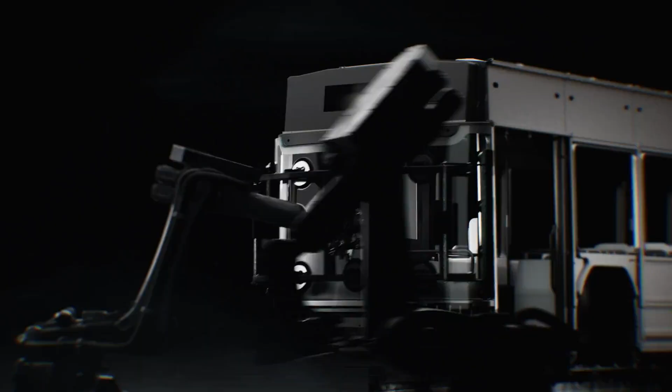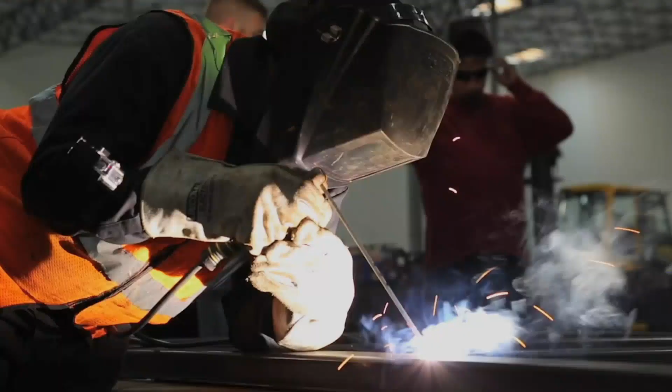A global technological revolution is underway. We think in the next 10 years, you'll see more innovation than we've seen in the past 50. Driven by passionate, dedicated individuals intent on shaping a new world. I want to create something new. I want to create something that gives me the sense of creating new life. This is why I'm here.

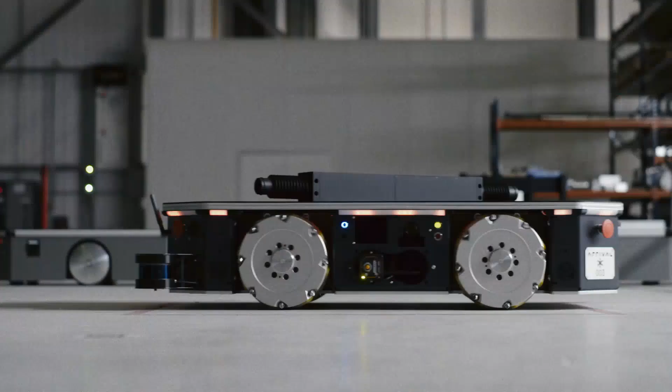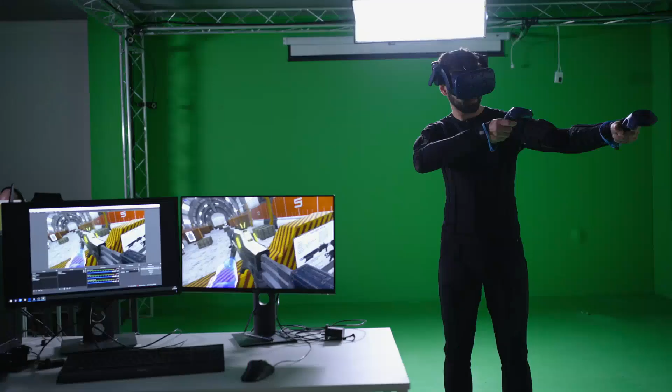A greener world. This is the last call to action, that we have to develop the solutions that are protecting our planet. A better world. I have a family, and when I think about the life I want them to have and their children to have, I want them to experience the world where they can travel and live without worry, and that gets me up and going every day.

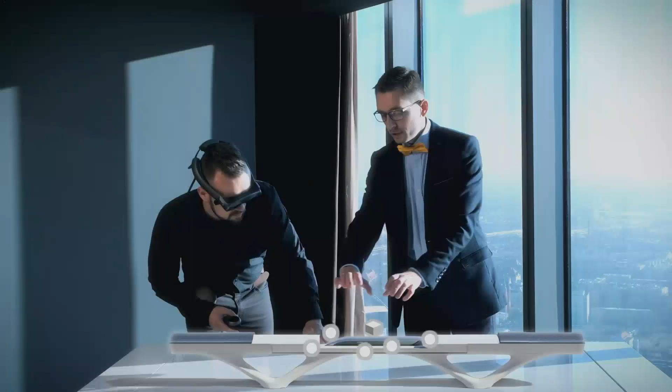Together, they are pushing engineering to its limits. Human creativity is the most tremendous power, and if you set a target, things that you never thought possible become possible. Creating extraordinary machines that can help the planet and humankind in the future.

If we are to stand a chance in our struggle to limit global warming, a change in the way we travel will be essential. Transportation accounts for 24% of global CO2 emissions. And in the US, that figure is 29%. The vast majority of it comes from what we drive on the road.

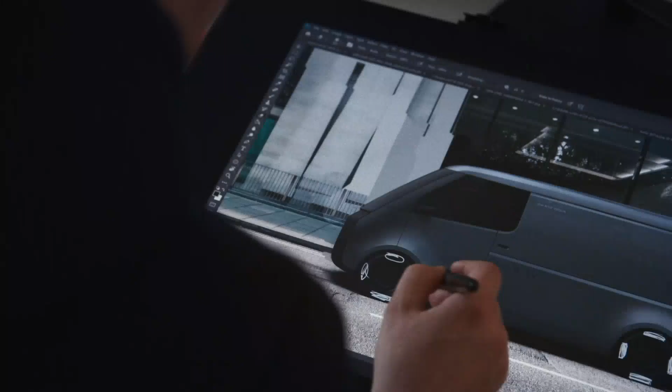Our relationship with the automobile has been a defining feature of modern life. But as we make the transition to electric power, many experts believe that the nature of this relationship is about to undergo a revolution. Without doubt, this presents a challenge, but it also presents the opportunity to redefine the way we travel.

No stranger to thinking differently about how we use vehicles is Robin Chase, co-founder of Zipcar, one of the world's leading car share companies, and Veniam, a data network company that is helping to support what's known as the Internet of Moving Things. She's worked with institutions and authorities around the world, developing innovative transport strategies.

I think of transportation as our gateway to opportunity. Whether you want to be educated, see friends, have a job, be healthy, go shopping, everything resides upon, can you get there? How much time, how much effort, how much money? It is the glue that makes our entire lives possible. So the idea that there's one type of vehicle or one type of mobility solution that will service all of our needs is craziness. And that was what happened in the last century.

When people buy a car, what happens is they think about their largest use case. They think, oh, I need to have it so in August I can take my family on some big trip with everything in back. But in reality, 70% of our trips are us alone in the car. And 50% of our trips are less than 3 miles or 5 kilometers. So the reality is, it's us moving alone by ourselves for the vast majority of our trips. And cars, whether they're electric or not, are vastly oversized for what we're actually doing.

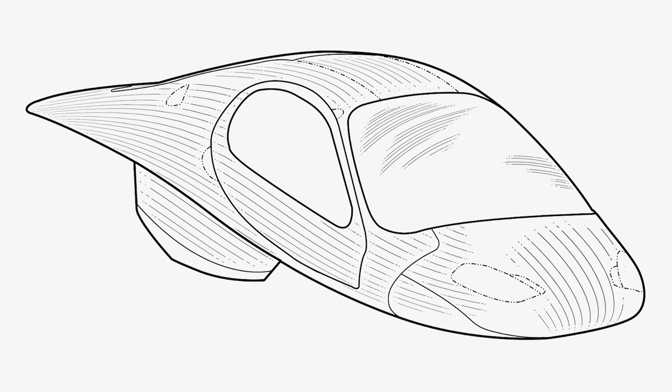That's a problem. And he said, I think that we can build a vehicle that takes that aerodynamic drag almost down to zero. Perfect, sign me up. Let's build that vehicle. And we didn't start with a marketing study or a focus group. We started with the engineering problem of how do you make transportation more efficient? And then we just ticked through the boxes on what would make the most efficient vehicle platform. And what you end up with is something that looks like what I have behind me.

When I first started looking at low drag shapes, I thought, well, let's look at the Streamliner hot rods from the 1950s and 60s. You had a lot of veterans who returned after World War II and were taking aircraft parts and drop tanks and turning them into hot rods and then taking them to the salt flats and seeing how fast they could go. And for the amount of horsepower and the size that they were, my back of the napkin calculations said that they should have been able to achieve much higher top speeds because of the streamlined shape.

What I didn't realize, and I guess maybe what they didn't realize at the time, is that a perfectly symmetrical streamlined shape has very low drag in the free stream, up high in the air. But when you bring it close to the ground, it has a completely different effect. In ground effect, it becomes a much higher drag shape. And so to make a streamlined shape that's also low drag in ground effect, it looks different.

And as it turns out, lots of creatures, fish, catfish, sharks, etc., that swim in the free stream, when they get down near the surface, they will change their body shape to lower their drag. And the reason they lower their drag is because nature hates inefficiency. Nature doesn't do anything inefficient. It's all about saving energy. So sharks really taught us a lot about how things work in ground effect. So that's why the Aptera looks a lot like a fish or a shark swimming close to the seafloor with a hump in its back.

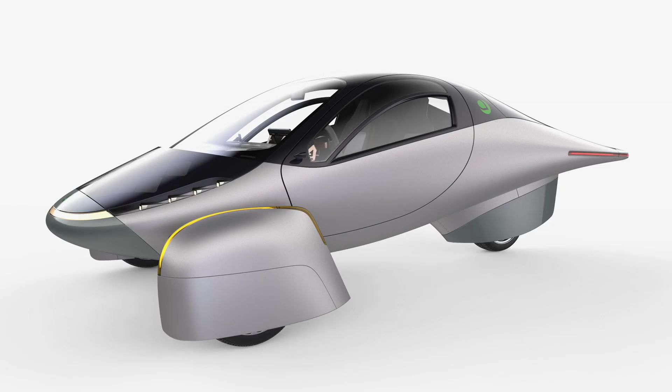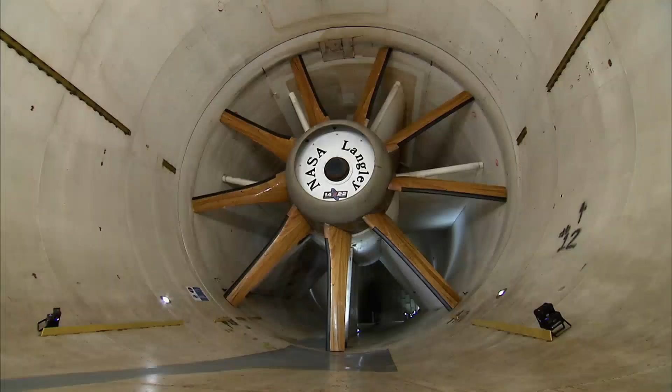Before we went out fundraising, we said we need to have some third-party seal of approval. Who could we get to also examine the shape, maybe put it in their wind tunnel, give us a thumbs up that it is low drag. And so we hired NASA Langley low-speed wind tunnel. And we had a conference call with them, and you could hear all the scientists on the conference call. They're like, this is the lowest drag road vehicle we've ever seen. Like, what are you guys doing? How does this work? And we said, what? We hired you to tell us how it works. You're NASA.

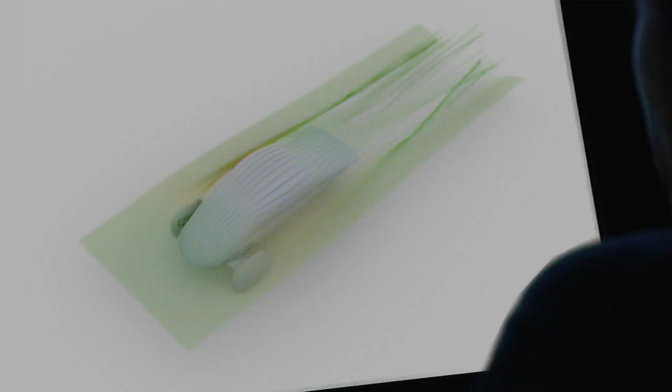What has enabled the team to fine-tune their design in a way that would have been impossible a decade ago are the advances in computational fluid dynamics. This is a computer tool that can accurately analyze complicated aerodynamics and airflows. We bought a lot of servers. This is after we got our funding, and we ran CFD 24 hours a day for virtually every shape that touches the wind in the vehicle. The processing power that you can put to these problems now is just immense. We can load a full vehicle model into our simulation deck and run it on a web server and have results in 4 hours now.

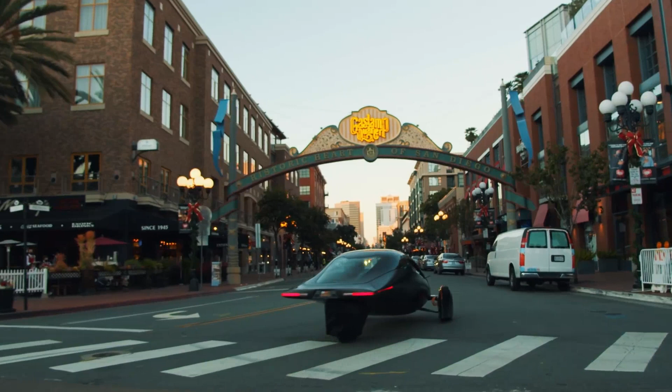Incredibly, the entire Aptera car has less aerodynamic drag than just one side view mirror that you'd find on an average American pickup truck. One aspect of the vehicle's design that often draws attention is the fact that it only has 3 wheels. We determined that if we got rid of a rear wheel, one, we don't really give up any performance characteristics, but we gain in aerodynamics, we lose some weight from having the structure to hold that extra wheel, and we have less rolling resistance. So you have a certain amount of weight that's deforming the tire constantly on every revolution that you ever drive. So if you can decrease the amount of contact patch on the road, you get better overall efficiency.

Our vehicle can go around the track as comfortably and as securely as any comparable 4-wheel vehicle. And one thing crucial to its stability is its center of gravity, which is greatly helped by the choice of powertrain.

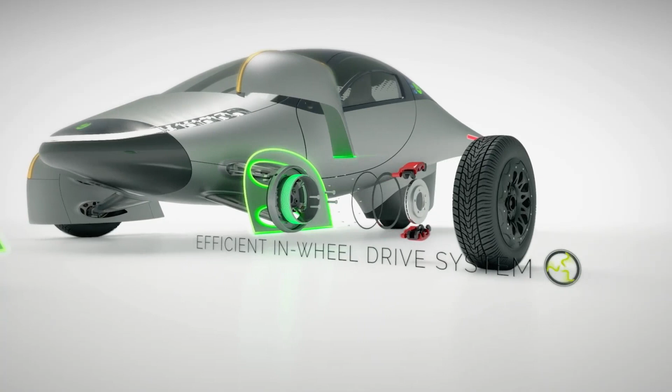How we power the vehicle is actually through the wheels. The motors are designed into the wheels. It takes the weight and puts it out at the corner of the vehicle, so you have a better center of gravity, which gives you more torque, so you get better 0 to 60 time acceleration, and it gives you more regen capabilities, so it saves your brakes and gives you better overall performance.

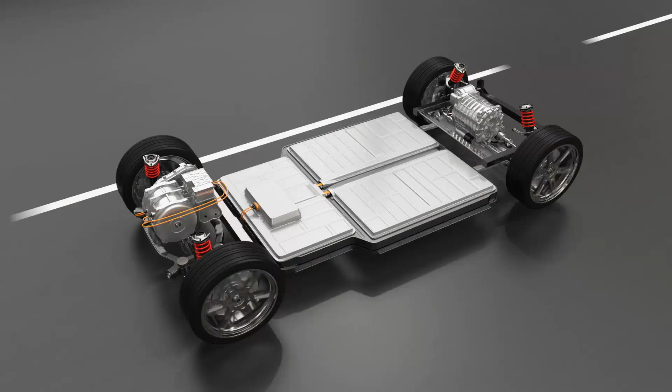Weight is crucially important to our efficiency, so the more we can reduce weight, the better. And one of the heaviest parts of an electric vehicle is the battery. Well, batteries are the most expensive part of the electric vehicle. And so if we can fundamentally reduce the number of batteries necessary to go from point A to point B compared to any other electric vehicle, then we're able to offer something that costs less to make and costs less to sell.

The combination of less weight, reduced rolling resistance, and world-leading aerodynamics means you need less energy to power it. With 100 watt-hours per mile energy usage, you can do things like charge with a regular extension cord from your garage. The same cable that you charge your cell phone with is a cable that you can charge the Aptera with up to 200 miles overnight. Also, if you're on a trip and you go to one of the roadside chargers, you're charging 4 or 5 times faster than any EV around you.

But the Aptera has one more energy-saving trick up its sleeve: its solar-powered charging capability. All the more pertinent given the US Department of Energy's predictions that electricity consumption is set to increase by as much as 38% by 2050, in large part because of electric vehicles.

We have a 700-watt solar panel on our roof, and that can produce over 4 kilowatt hours of power per day in sunnier places. That's 40 miles of free driving per day just because you parked it out in the sun. But for most Americans that drive less than 40 miles a day, 60 kilometers or so, you wouldn't have to plug it in. And the reason why it's even feasible is because the vehicle is so efficient.

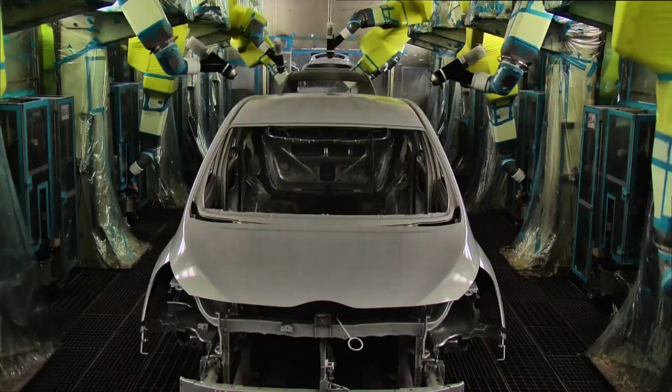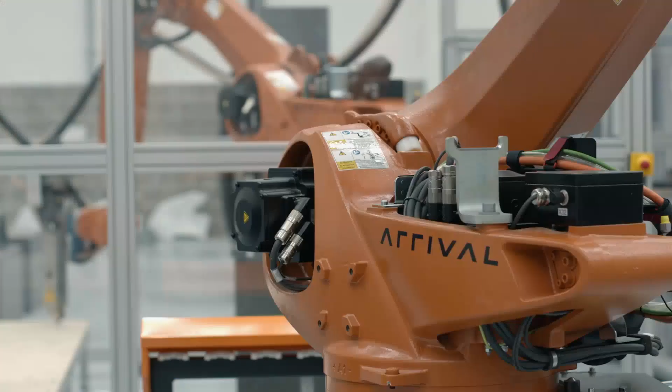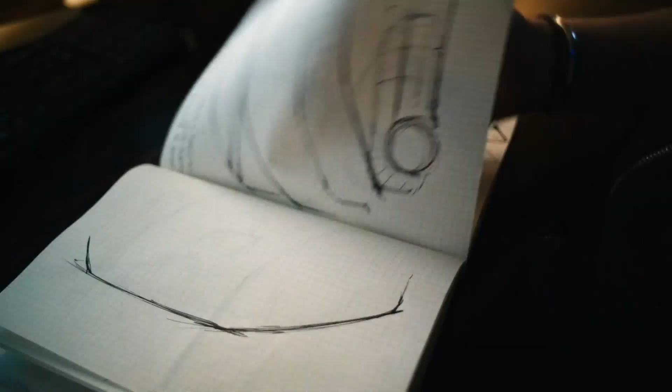When Denis Sverdlov decided to found Arrival, it was because he felt it was not just the type of vehicles that needed changing, but the entire auto manufacturing model. That is not enough, because we still get vehicles which are expensive and that's not sustainable. You don't need to have a compromise between being green or being efficient. And that's why we started Arrival in January 2015 with the idea to reinvent the way vehicles are made. But where to start? Well, for Denis and his team, one particular sector above all stood out: commercial vehicles.

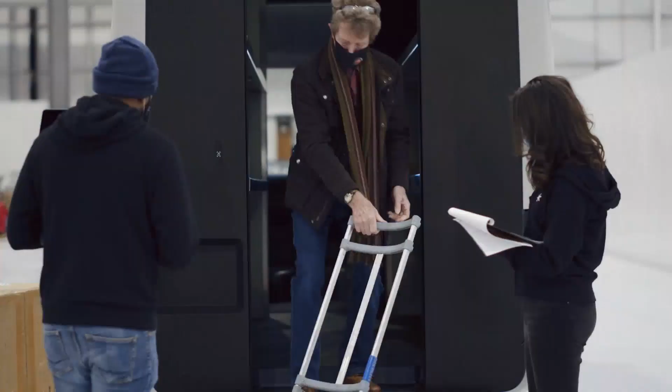These are the vehicles that are being driven 8-10 hours, day after day after day. If there are any vehicles in a city that you'd want to replace with zero-emission vehicles, it would be these commercial vehicles. One of the aims of Arrival is to be able to work with companies and create a bespoke vehicle specifically targeted to their needs, which is exactly what they've been doing with UPS, with whom they have jointly been developing a new delivery van.

But how will this new startup company compete on price with established automotive giants who spent over a century mastering the production line and economies of scale? I think the real opportunity with a startup, with a new company, is you don't have any of those existing assets. You can set off in a completely new direction.

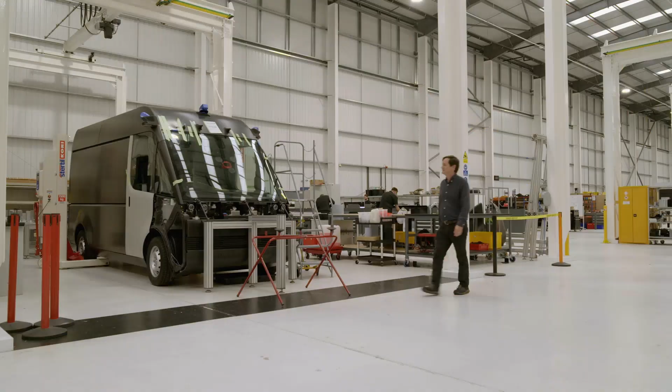The approach that Arrival has taken can in many ways be encapsulated by the words of the influential 20th century economist Ernst Friedrich Schumacher. He wrote something along the lines of, any intelligent fool can make things bigger and more complicated, but it takes a lot of courage to move in the opposite direction. I love this quote. It really captures our DNA, what we do here, how we develop things.

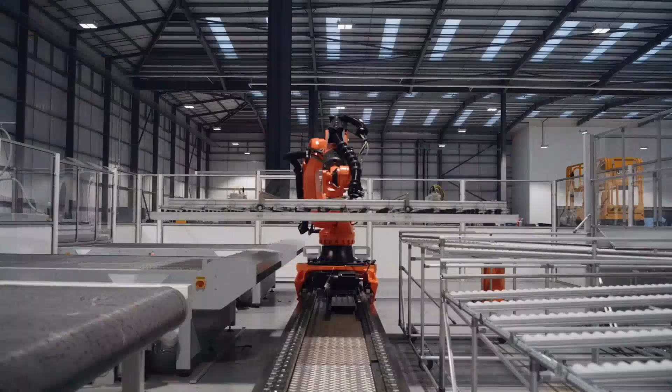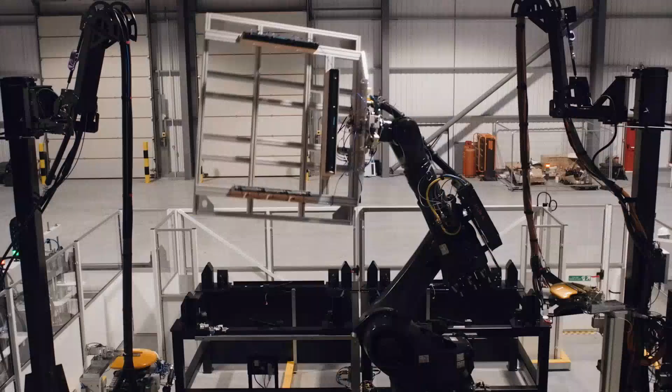Large automobile factories can take years to build and have a price tag of over $1 billion. Arrival believe that for just $50 million, they can take over an existing warehouse and within 6 months be able to produce 10,000 vehicles a year. Able to be built all over the world in locations where the vehicles are needed, they will employ local people, pay local taxes, require less infrastructure, and be able to provide specific models suitable to that location.

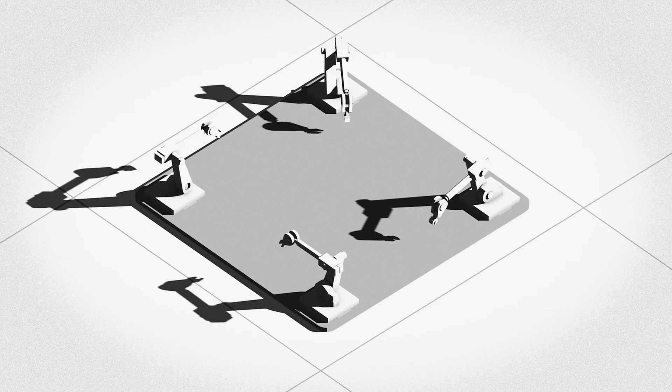They call it a microfactory, which instead of housing a conventional production line, uses a collection of robotic cells. And we have a whole array of these cells that do different operations. But the key to it is how we link them together. We link them together through mobile robotics. So literally a little wheeled robot that carries parts and vehicles from cell to cell.

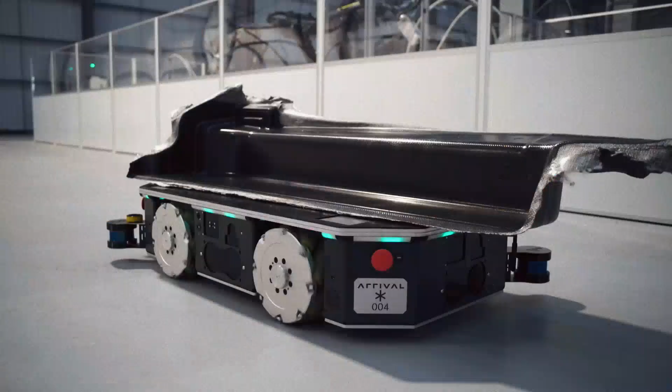I've been building robots since I was a kid, right? From toys. I was fascinated with robots. I was fascinated with the spacecraft. So all my studies over the years were focused on this: space exploration, robotics, and AI. I met Denis after having worked on a space mission for the European Space Agency. We discussed how to use technology to have a positive impact on people. And we liked each other, and I jumped on board. I left the space program and I joined Arrival.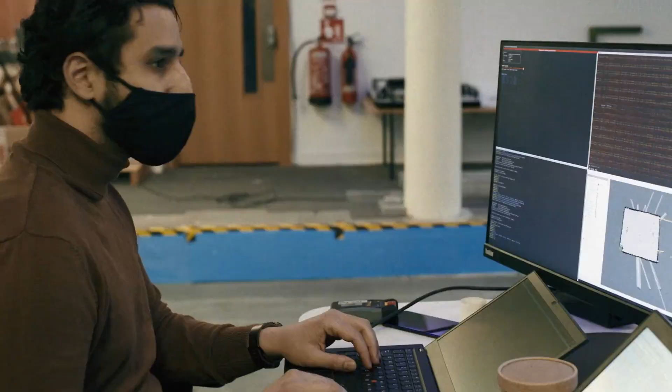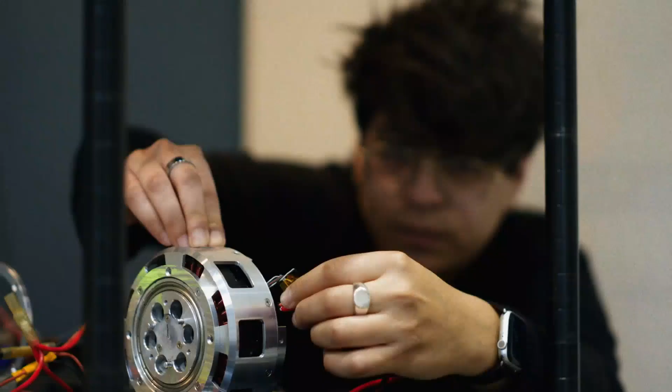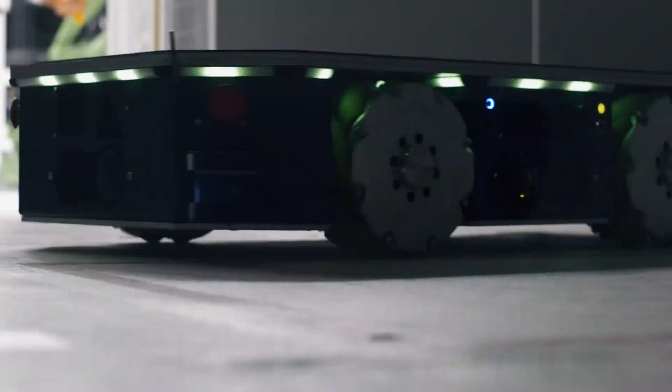Where once in the traditional automotive industry, it was tool makers who were crucial for the implementation of mass production, today a different type of engineer is at the heart of this new way of building vehicles. More than half of our people are software engineers. We are strongly software people. What this means is that we spread intelligence in every robotic asset that we have on the shop floor. These robots sense and perceive the environment. They gather the data, they process it in real time, and they use this data to execute operations in real time. If something changes in the environment, they react.

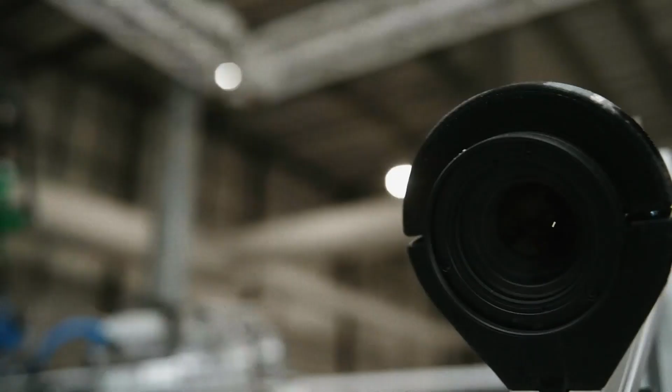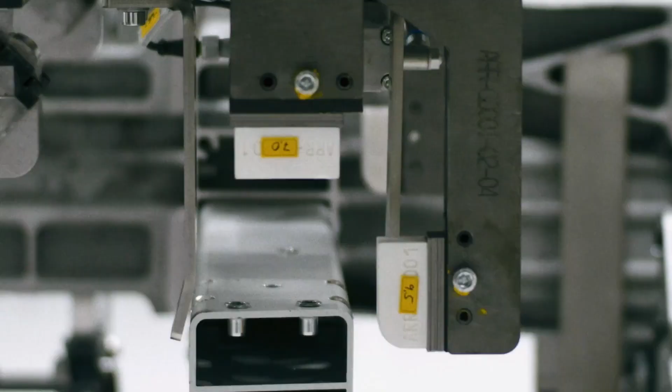And then we have an operation control system. You may think about it as the overlord of the factory, right? The AI that runs it. And this system continuously gathers information from all the children, from all the robotic assets on the shop floor. We have done a lot of work on computer vision, and we've developed something quite unique. Our systems are capable of understanding the position of an object, classifying that object, understanding the position in 6 degrees of freedom, so in space, in any location, with sub-millimeter accuracy.

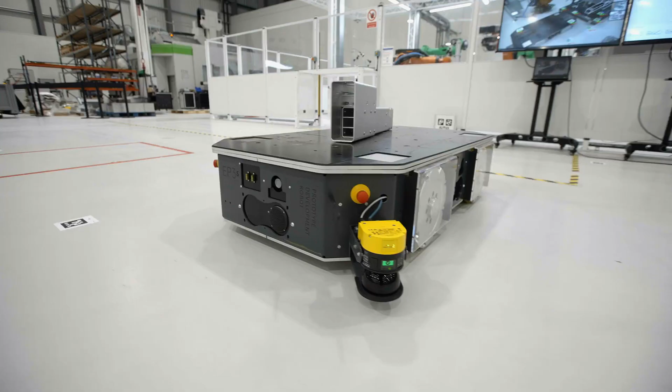These are robots that can navigate autonomously in the environment, can avoid obstacles, can detect any anomalies in the environment, and can react dynamically. And also work together. These robots can connect to each other to create a larger platform that can transfer bigger and larger payloads. But as clever and sophisticated as the system is, if the microfactory concept is going to work, it'll need the right materials to work with. I'm going to be a bit biased here, in that I think materials are foundational to a lot of this.

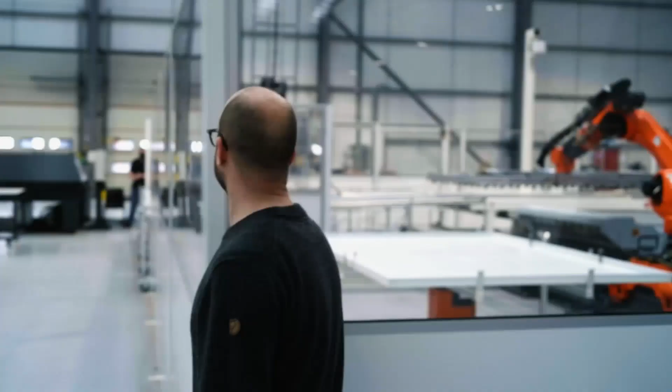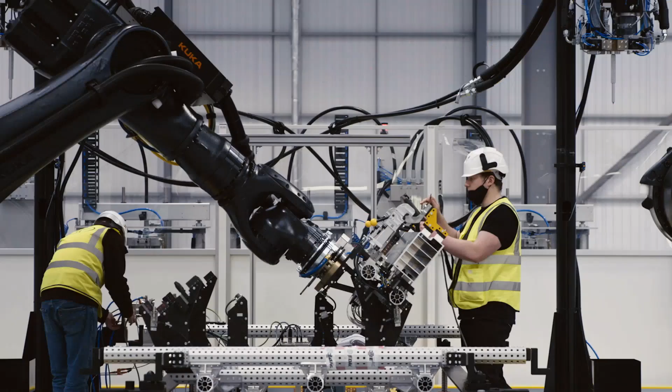If you're going to manufacture something anywhere in the world, then you can go one of two routes. You can either source in one place and transport it, or you source close to where you're making. And our strategy is very much to try and source as close as we can to the factories to support local communities, local economies, and to build relationships in those areas. So if we want to be able to build a microfactory anywhere, on a high street, in a warehouse, you have to start asking questions about the kind of materials that are going to go into the factories. They also have to be recyclable, because you need to be able to reprocess them wherever you are.

You know, if a van's built in one part of the world, it should be recycled wherever it ends up. So that drives a certain type of materials logic. In order to meet all these criteria, it was decided to use an aluminium chassis onto which would be put a body made from thermoplastic composites.

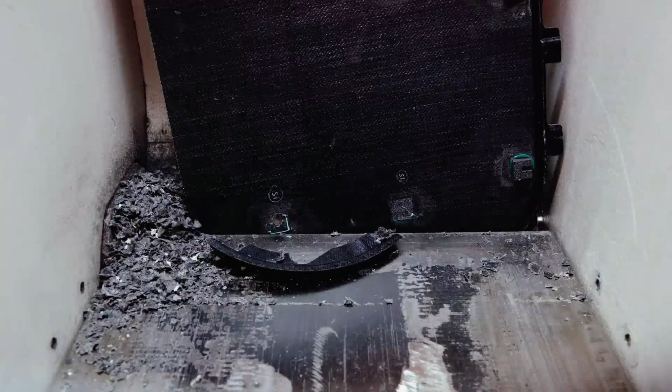Able to be molded into shapes when heated, thermoplastic composites differ to many other forms of composites because it's a process that can be reversed and repeated many times, making it perfect for recycling and giving the product an almost indefinite shelf life.

It's where there is a huge amount of innovation in the industry. We can process that by 3D printing, so we can make prototypes. We can turn it into injection molded components. We can process it into compression molded or extruded, or you can make garments from thermoplastic materials. The amount of opportunity of thermoplastics is just immense.

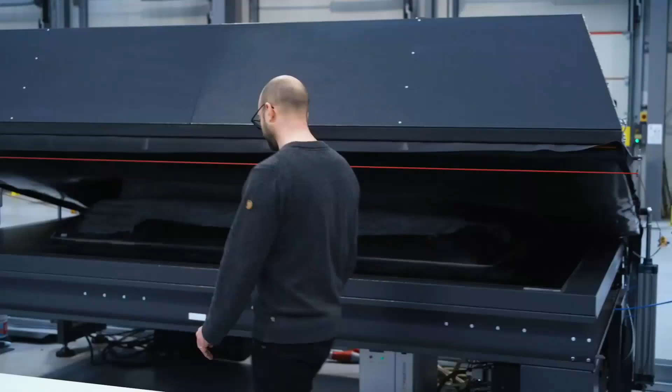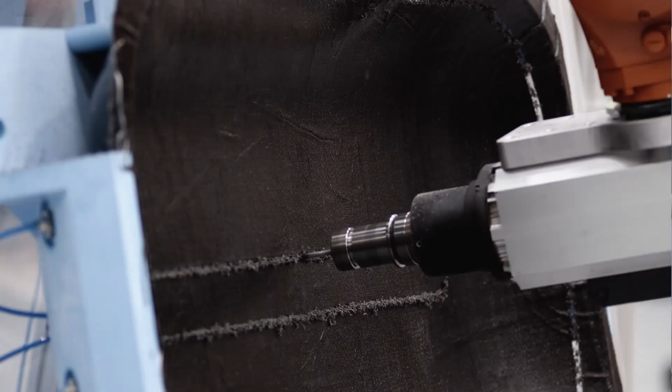The company have developed their own composites, tailor-made for their requirements. Those destined for body panels arrive at the factory in the form of rolls of fabric. These are cut to size, layered, and molded into a variety of different shapes, and all done autonomously, using far less machinery and energy than a conventional automotive plant. And what's more, waste is eliminated because the properties of the material allow any offcuts to be recycled and made into other components.

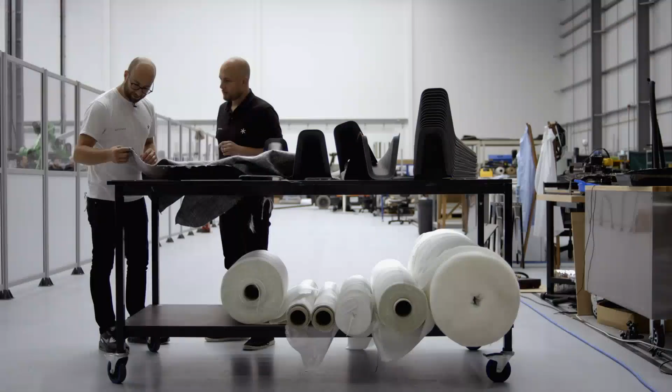That's so fundamentally different from the conventional way of working. When people join the company, it's quite mind-blowing. We are weaving fabrics and knitting, and there is no paint. The color is throughout the panel, and you can recycle the whole panel at the end of its life. Panels are also able to withstand impacts in a way that no steel equivalent ever could.

All of which is of considerable appeal to commercial fleet operators. Their vehicles are their brand that's rolling around in those communities day after day, so they always want their vehicles to look their best. They spend an enormous amount of money every year per vehicle to keep their vehicles looking so good.

This combination of versatile materials and a highly agile production process is also changing the way the company approaches its research and development. So in regular R&D, I'm used to working on projects that are 2 to 4 years long. And here we're expected to turn around proof of concepts in a matter of weeks. If it takes longer than a month, then it gives us pause for thought. The point is to prove your idea as quickly as you can, and then that means that you can cycle through ideas much quicker.

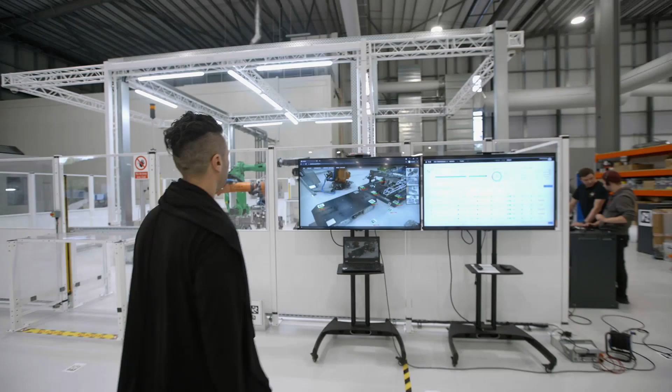So the other core concept for us is that failure is not a bad thing. I encourage my team to fail as often as they can, because it's only when you fail that you either discard an idea and move on, or you keep learning. This ability to utilize the AI software to transpose concepts into production has enabled the team not only to develop commercial vans, but also buses and rideshare vehicles.

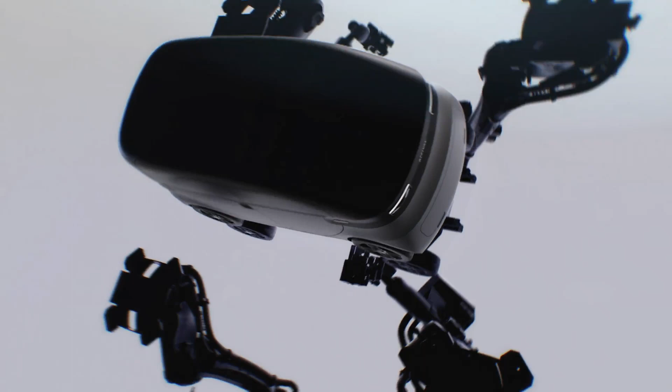With a growing list of customers, Arrival has already set up 1 microfactory in the UK and 2 others in the US, with more planned for other countries in the pipeline. In hindsight, some of the most revolutionary ideas seem obvious, and I wonder if people will talk about microfactories that way in a few years. I can't explain exactly why nobody's thought of it before, but it is clear that bringing together the right group of people on the right mission with the right set of objectives was an important part of developing this very different approach.

There are still many challenges that need to be overcome to successfully make the transition to full use of electric vehicles. Today, over half the world's population live in urban areas. In Europe, it's almost 3/4, and in North America, it's higher still at 82%. And these figures are only set to increase.

Many towns and cities have road layouts that are hundreds of years old, meaning space for charging is at a premium. It's sobering to consider that 40% of Americans do not live in a home where they can use a personal charger. So while some have been tackling the issue of electric vehicles themselves, others have been wrestling with the problem of how to charge them.

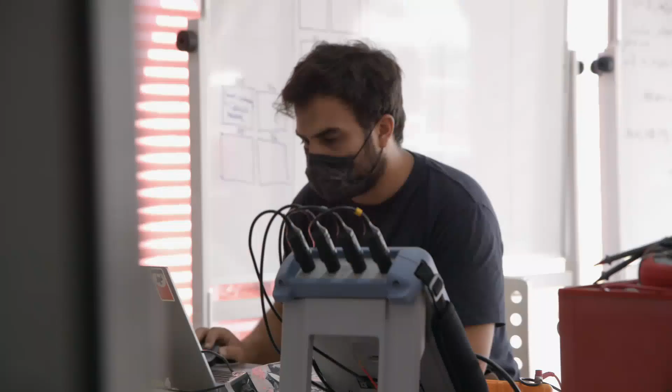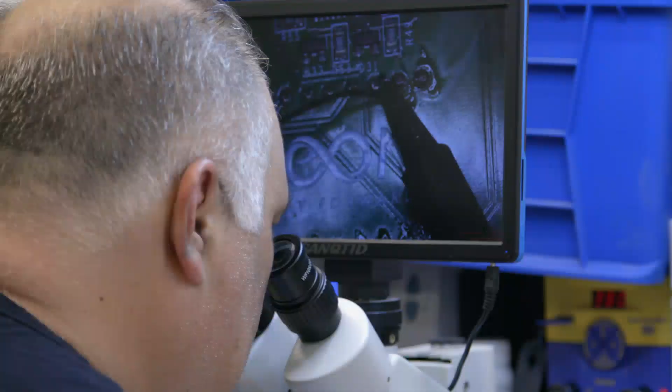It was a brilliant concept, but sadly, at the time, there were no commercial applications. It would take another century for the principle to be adopted by charging devices in our homes. But for the system to be viable for large-scale vehicle use, it would need to be made much more efficient. When they started, it was estimated that almost half the electricity would be lost during the wireless transfer. But the team were confident that by fine-tuning all the various components, as well as the power levels and oscillation frequency, this could be dramatically improved.

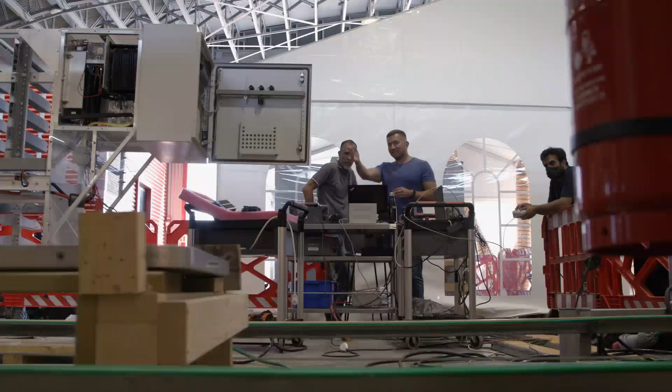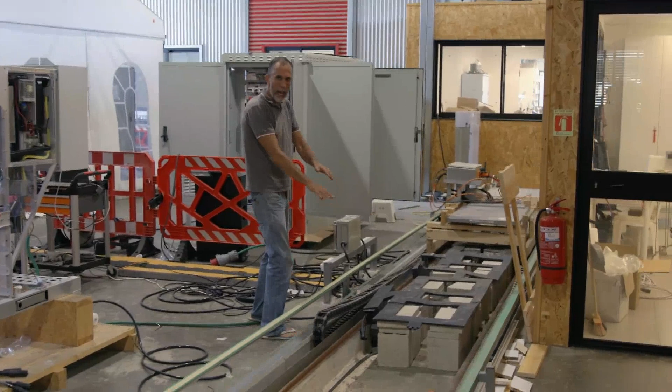So first, when we established the company, we focused on dynamic wireless charging or electric road systems. It means that we electrify the road and we charge the vehicle while the vehicle is in motion. So this device is part of the R&D work. You can see here that this simulates an actual vehicle driving on the road and being charged while driving. So those are the coils that are under the asphalt, and this is the receiver that is under the vehicle. Those coils are deployed under the asphalt about 8 to 10 centimeters.

The coils emit energy to those receivers only when there's an authorized receiver that communicates with the coil, and then the energy is delivered. Otherwise, those coils are totally passive. So as a general rule, our wireless charging technology charges at approximately the same speed as any standard conductive charging solution that you can buy and use at home. Having developed the theory, they built a 300-meter test track where they spent 3 years testing a variety of vehicles and perfecting the system to a point where it achieves an energy transfer efficiency of up to 91% in test conditions.

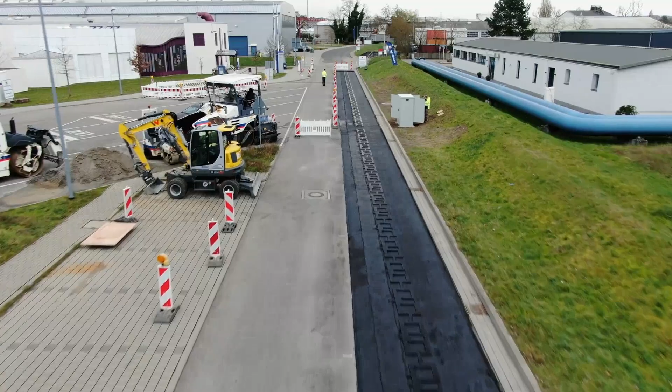They also perfected the system to charge static and parked vehicles. It can be installed in locations where conductive or plug-in charging cannot be. So locations like bus stations and garages, inside city centers, underneath taxi queues or stands, directly under the loading docks at commercial facilities, and of course roads and street parking, for example, because there's no interference with the pavement or with the road. Everything can be underground. With the ability to charge both moving and stationary vehicles, the next step was to put it into practice in the real world.

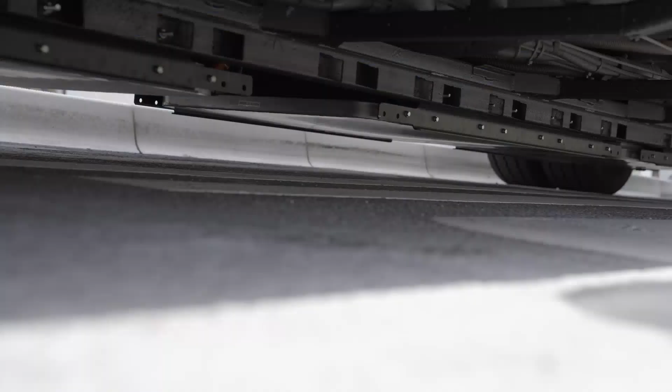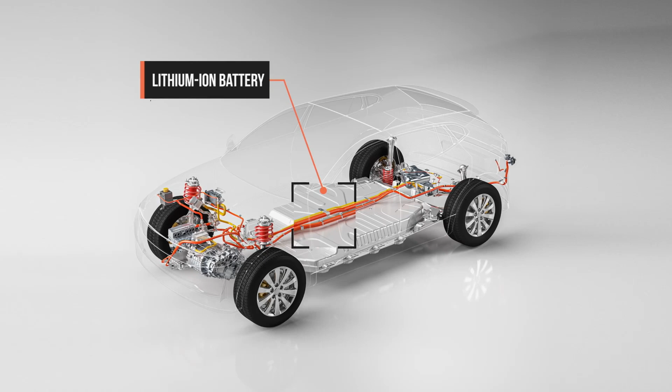In Tel Aviv and in Karlsruhe in Germany, we have a public pilot on the roads there with the public bus operator in the city. And in both instances, we're demonstrating that a combination of stationary charging at the terminal or at the bus station for a few minutes while the vehicle is parked, plus some small stretch of dynamic wireless charging along the route of the bus, is enough to power the vehicles so that they can run 24/7, and we can simultaneously reduce the size or the capacity of the batteries. And it's this ability to reduce battery size that could be hugely significant as the number of electric vehicles on our roads increases.

There are about 1.4 billion vehicles on our roads today globally. We just haven't found all of the resources that we require in order to shift to electric mobility on a global scale. There are issues around destroying habitats, for example, from mining for cobalt or for lithium. And so anything that we could do to minimize the impacts and to minimize the size of the batteries is probably going to be a good thing. In theory, we can reduce battery capacity by up to 90% as long as we have wireless charging in convenient and accessible locations.

In Gotland, Sweden, they are already successfully operating the world's longest continuous electric road system, stretching over 1.6 kilometers. It charges not only a public bus at the moment, but also a 40-ton truck. What's so significant about this trial is that it demonstrates the ability to simultaneously charge different-sized vehicles with different energy requirements. The system is totally automatic, so the driver doesn't need to do anything, he just needs to drive.

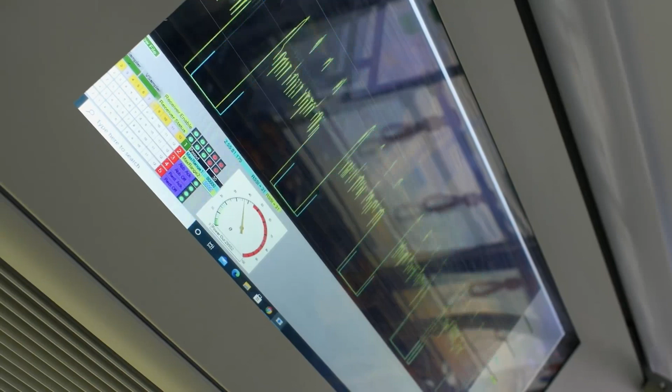We have a metering device inside the vehicles, so this is how we know exactly how much energy every vehicle consumes. Each 100-meter section contains 60 charging units, each able to charge an individual vehicle, meaning that volume of traffic will not be an issue. It is hoped that in Europe alone, there could be at least 14,000 kilometers of such roads by 2030.

But what sort of disruption would installing such a network cause? Of course, we're not suggesting that we would come into any city and tear up all the roads in the city. We're looking at finding strategic locations where it makes sense to deploy because you have enough heavy traffic. So if you looked at a city grid, for example, you'd be looking at deploying somewhere between 15 to 30% of the main roads. If deployed at scale, the team estimate the costs to be around $650,000 per kilometer.

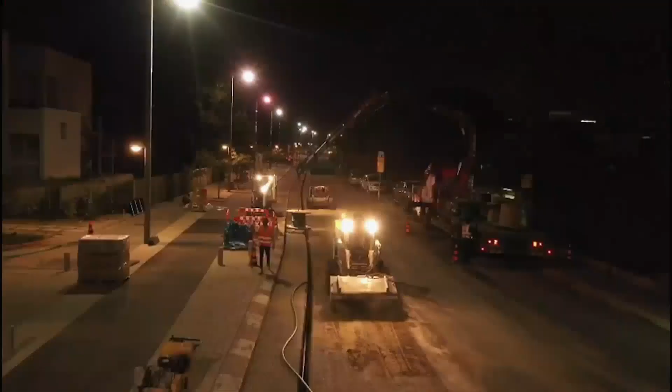When we established the company, we had a mission to deploy 1 kilometer within 1 day. And actually, it was a joke 9 years ago. But today, we can show that we did it twice, in Tel Aviv and in Sweden. Our goal is to pave a whole city in a few weeks. And we are talking about a huge infrastructure project. And to do it in a few weeks is a huge challenge, but I believe that we will reach that goal.

I think everyone has to accept a bit of change. It's a deep-seated connection to a personal vehicle that many people have. Many of us are going to have to let that go. Without question, our relationship with the car and car ownership is about to change. But will it necessarily be a bad thing?

In the United States, the country most synonymous with the car, over 10 million households already don't have access to one. And when combustion engines are finally phased out, will there be enough used electric vehicles available at a price people can afford? Who is buying new cars? Who can afford new cars? Around the world, the average age of the car has been going up. It used to be around 9 years, and now it crept to 10, 11, now it's up to 12. The average age of a new car owner is 52 to 54 years old around the world.

Also, the economic burden on us is phenomenal. On average, and I was looking at these numbers in countries around the world, it's about 15% of a household's budget spent on their car. And that means when you go to work, the first hour and a half of your work is paying off how you get to and from work. For the poorest 20% of us, it's 33% of their household budgets going to their car. And I was just seeing a study of the US that had counties highlighted, and there were some counties in which 80% of a person's income paid for their car. It's mind-boggling.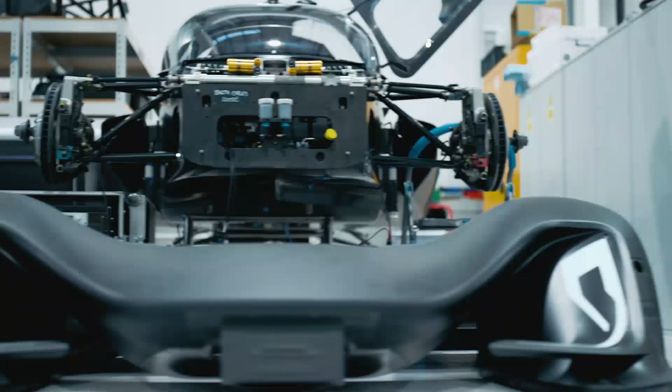With concerns being raised about the embodied energy and the carbon footprint of electric vehicle production, particularly with regards to certain giga-scale battery manufacturing, could shared ownership be part of the solution? The notion of car share is well established, but how do you persuade people who are wedded to the convenience of having their own car to use them? Could autonomous cars that deliver themselves to your door be the answer? And just how good would the technology need to be? Not content with reinventing the factory, Arrival are also pushing AI technology in cars to a whole new level.

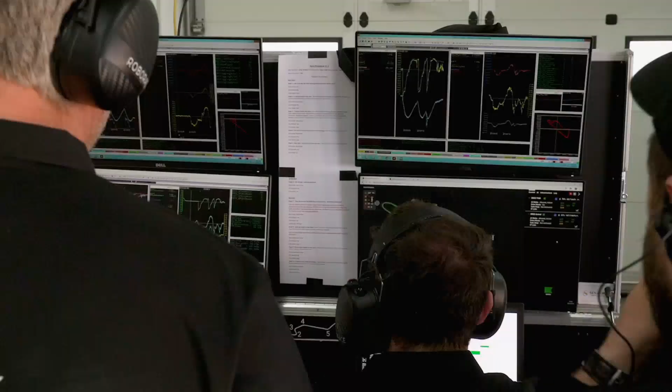Hi, my name is Max Kumskoy. I'm a product lead of the autonomous driving team at Arrival. Max and his team are developing what is known as a full-stack autonomous driving system. A system which can operate without the need for maps or GPS tracking. A system that will rely on what it sees and senses.

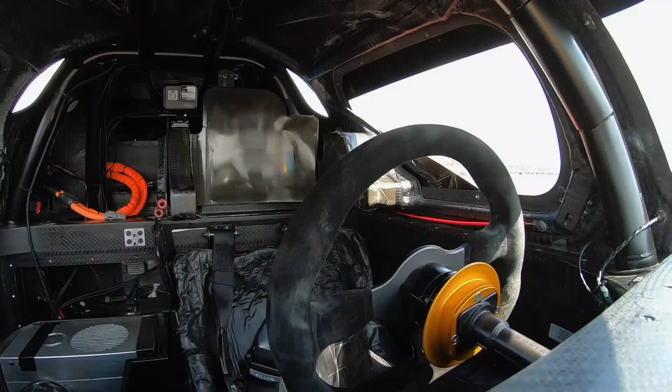Autonomous vehicles typically rely on a range of sensors, including radar, LiDAR, which is similar to radar, but instead of radio waves detects reflected light, ultrasound, and cameras to be able to see things like road signs. From all this information, onboard computers are able to generate a 3D model of the vehicle's environment. And all of this has to happen and be processed in real time.

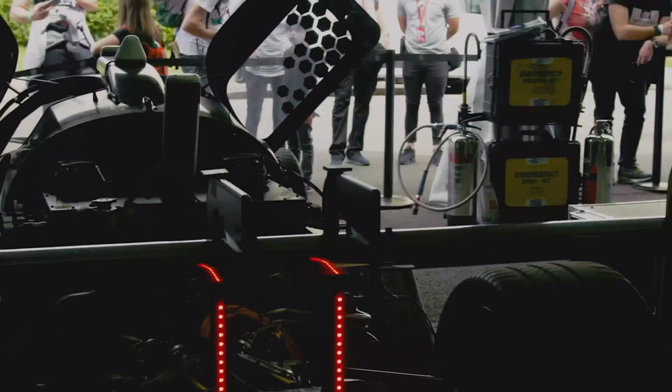You think, all right, you're good. But how do you know that you're good? You need to test yourself against somebody who is already recognized as a top performer. RoboRace was a championship started by Arrival's founder, Denis Sverdlov, which allows AI teams from around the world to compete against each other to achieve the fastest lap. But for Max and his colleagues, this just wasn't challenging enough. In Rome in 2016, the Arrival team took on the American professional drifter, Ryan Tuerck.

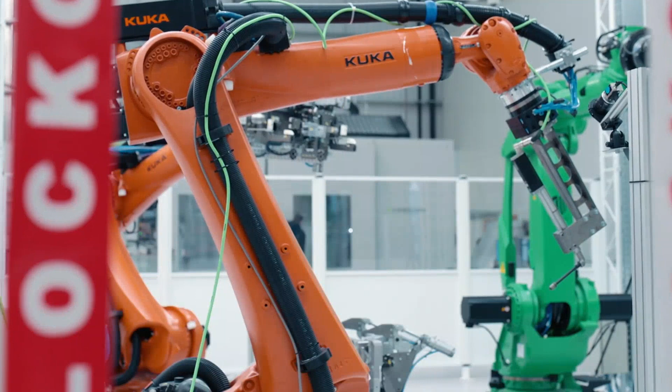And we saw the time, and it was just a disaster. The gap was just unbelievable. We were like, well, we can do better, because actually a computer has lots of advantages over a human, and we were like, why are we not using it? What was just a fun bet now turned into a massive development of vehicle stabilization algorithms for autonomous cars.

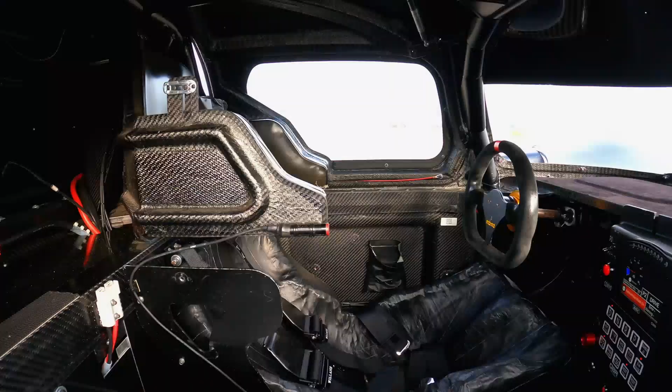They developed a series of algorithms to perform different roles. One to perceive the surrounding environment, including other potential road users. Another to determine which route or path to take. One for what speed to go, and one to actually control the car.

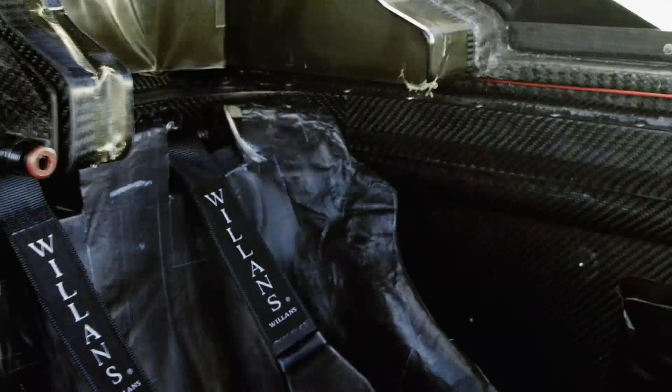But that's not it. So you start driving, you are in motion, and then, life happens. There can be a sharp corner, so your car can get out of control. So you need to have another algorithm that will actually detect that you are about to crash or about to do something dangerous and prevent or save the car from the situation. When it came to testing their improved AI system, they decided to take things to a whole new level.

Lucas di Grassi has been racing since he was 10 years old. Having graduated from Formula One, he went on to become one of the co-founders of Formula E, and is now the most successful driver on the Formula E grid. I think here the team has a big chance of performing really well. I hope I can still beat it, but deeply I want the team to be very, very fast.

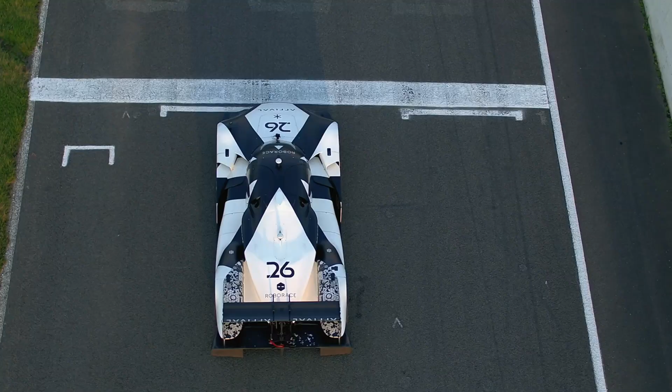The car was doing its best, but it wasn't changing its performance from lap to lap. And we saw that the gap with Lucas or with Ryan was huge. And we thought, all right, what is he doing that we are not? And we realized that he's actually learning. He is learning and adjusting from lap to lap. And that's when we implemented an additional algorithm that was learning. And that's when the car started to be faster from lap to lap.

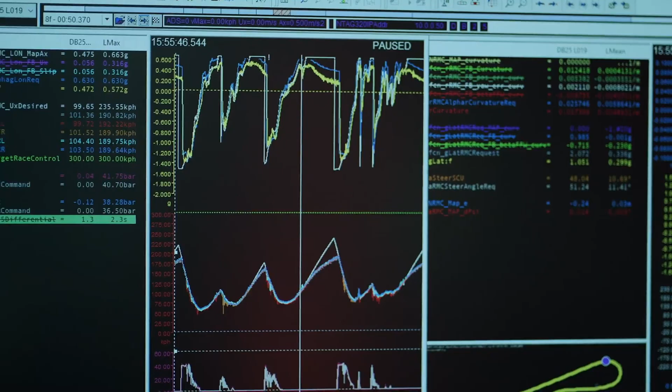So it was taking into account everything it knew about the track from lap 1 to lap 2. Where can it go faster? Where can it go slower? That was a major point in our racing career. The car started to learn, and it was getting closer and closer to a human driver.

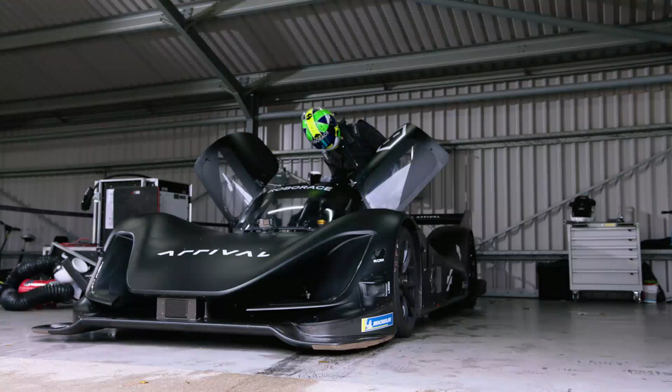By analyzing all the performance data, the AI system can work out what it does differently each time, and if it makes it go faster. It then changes its driving behavior to reflect what it believes is the most efficient method. And over time, it's able to perfect this. By mid-2020, there was a palpable sense within the motor racing world that racing drivers were about to suffer the same fate as chess grandmasters.

First of all, I have 25 years of experience, while the AI has only like 2 or 3 years. So that's a bit unfair. But we are both controlling the car in the same fashion. So you have only access to steering, throttle, brake, and you have to combine these 3 inputs to create the best lap time around the track. It was time to test the new learning algorithm. Would it provide the extra edge needed to outperform Lucas?

But just when it looked like a breakthrough was possible, Mother Nature intervened. So I had a lot of fun out there. The problem is that there are patches of dry and wet. So some corners, the optimum line is where it's a little bit more dry. Launching in 3, 2, 1.

The conditions haven't improved, and the autonomous car's new systems will be tested to the limit. Whoa. And now it starts to rain again, so it's very hard to compare now. Yes, good effort. That was amazing. I've never seen it correct like that before. The autonomous car is definitely improving. But has it done enough to beat Lucas?

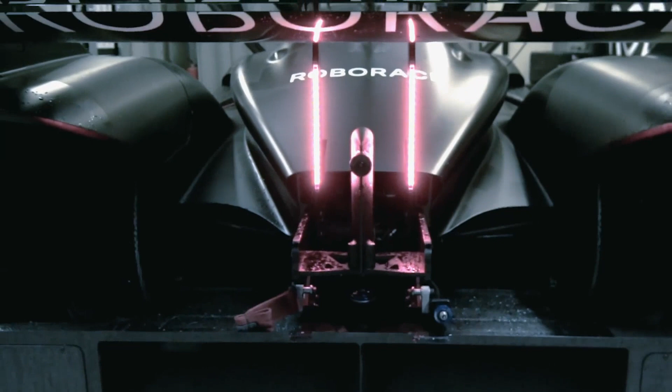Who knows whether the car could have won without the rain? But the team believe it's just a matter of time. The ultimate challenge for Arrival and for their Roborace team is to make the autonomous car smarter than a human. You can spend a lot of time to teach one human how to drive fast and safe. You can spend a lot of money on his entire racing career. That would be one guy.

How do you copy that knowledge to the rest of us? You can't, right? With the computer application, it's different. You take all the bits, all the knowledge from those guys, you put it to the code, and then you copy this code to all the cars. That's essentially what we're doing. We're learning from them, putting it to the code, put the code to car, and copy.

This is so important. This is so breakthrough from Arrival and from Roborace. In a couple of years, the world will look back at what we are doing today as something that pushed this technology that eventually will change a little bit the world for a better, safer place in the future.

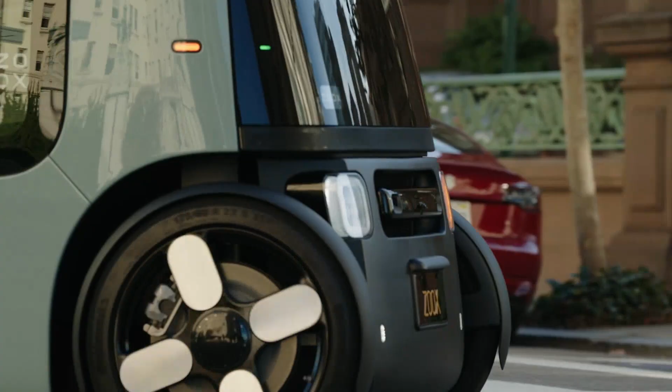Autonomous vehicles are currently being trialed all over the world. Companies such as Zoox have created rideshare versions. Taxis and buses are also being intensively tested, and in certain cities, they are even being integrated into the public transport network. Looking into the future, some envisage AI technology being used on a grand scale to coordinate citywide traffic flow, with technology optimizing speeds and the changing of traffic signals.

Done well, I think autonomous vehicles are a spectacular addition to a multimodal lifestyle, but we have to make sure that we do not own those vehicles. The concerns over privately owned vehicles is centered around their potential to actually make congestion worse. With an autonomous vehicle, I don't need to park. Please let me out. You just keep circling. I don't care what you do. Doesn't bother me because it's going to cost me nothing. I'll have my tea. I'll chat with my friend for an extra hour, and you come back when I call you. So that's hell. Heaven.

So this transition to autonomous vehicles also comes with fitting into our multimodal lifestyle, where I can now have shared cars everywhere, even for people who live in rural places. And then there's the issue of how us humans will react to seeing empty vehicles driving along on their way to pick up passengers. Will normal driving courtesies still be observed? Yeah, that's a really big, so far unanswered question, right? You know, are people going to be kind to them? I think there's going to have to be a lot of work done to make people comfortable with the concept.